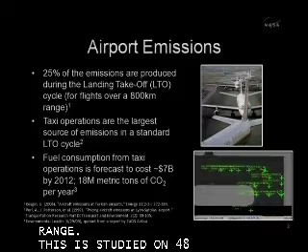All right, so there are some statistics I'd like to share with you. About 25% of emissions are produced during the landing and takeoff cycle, or LTO cycle, for flights over 800 kilometer or 500 miles range. This is a study done on 48 airports in Turkey. And the LTO cycle basically includes final approach and landing, taxi in and taxi out, and climb phases of flight.

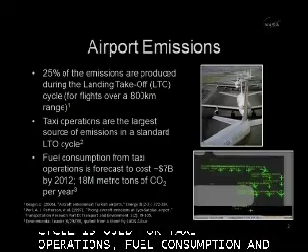And taxi operations are the largest source of emissions in a standard LTO cycle. A study showed that up to 72% of the emissions out of the LTO cycle is used for taxi operations. A huge amount of fuel consumption and emissions are from taxi operations. And then another report says fuel consumption from taxi operations is forecasted to cost about $7 billion by 2012 worldwide, and 18 million metric tons of carbon dioxide per year.

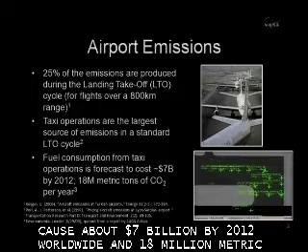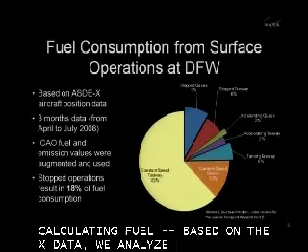By the way, these statistics are based on ICAO data bank rates, which has very approximate, high-level approximation solutions. So NASA has done more work on the method development for calculating fuel consumption and emissions for surface operations. So based on the ASDE-X data, which is quite accurate surface surveillance data system, we analyzed each aircraft trajectory so that we divided taxi phase of flight into different states of aircraft.

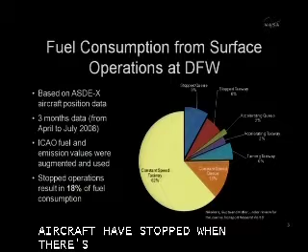For example, aircraft have stopped when there is a queue build, or aircraft is taxiing at a constant speed or decelerating, or aircraft is accelerating from stop to gain speed. So depending on those states of aircraft, we have to use different thrust levels. So we developed a thrust level model based on literature survey as well as pilot interviews.

So based on that thrust level, we can easily calculate flow rate and emission indices from ICAO data bank through extrapolation. So we took data from DFW, Dallas-Fort Worth International Airport data for about 3 months in 2008, and then we calculated total average daily fuel consumption and emissions on those taxi operations.

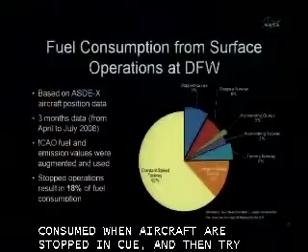So the pie chart you see is the breakdown of fuel consumption for taxi operations. As you can see, there's about 81% of fuel actually consumed for constant speed taxiing or decelerating type of operation, normal taxi operation. But 18 to 19% of fuel is consumed when aircraft are stopped in a queue and then try to gain speed by accelerating. So up to as much as 18 to 19% of fuel is consumed for those stop operations.

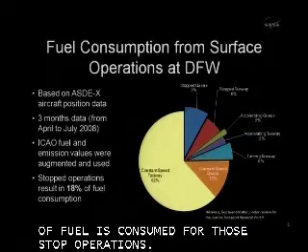So if we can somehow eliminate those stop operations, or reduce stop operations as much as we can by making surface operations much more efficient, then there is tremendous gain in fuel saving as well as reduction of emissions and noise. And the next chart shows, again, the same data analysis result, average daily fuel consumption and emissions.

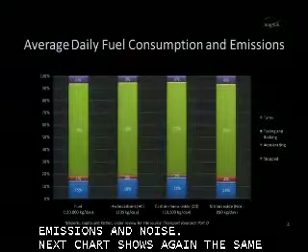So as you can see, not only the percentage of fuel consumption and emissions on taxi operations breakdown, but it also shows the total amount of fuel consumed per day and also emissions, basically hydrocarbon, carbon monoxide, and nitrogen oxide emissions. So for example, for fuel consumption, there is up to 120,000 kilograms or 40,000 gallons of jet fuel used for daily taxi operations.

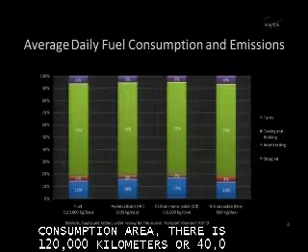So 18 to 19% of that is almost like 7,000 gallons of jet fuel being consumed just for stop-and-go type situations. So if you do simple math, 365 days a year, it ends up like $5.5 million of fuel cost spent just for stop-and-go situations for the Dallas-Fort Worth International Airport situation. So that's quite a significant amount of the dollar spent wasted for stop and go situations.

So the question is, can we make it better, or can we make the surface more operationally efficient? That is kind of the focus of NASA surface research. All right, so the surface environmental research that NASA is conducting is to develop concepts of energy efficient operations and decision support tools to make surface operations much more efficient, and thus will lead to less environmental impact. So we focus on more efficient operations that will lead us to less environmental impact.

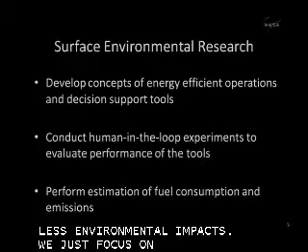And secondly, with the concepts and technology algorithms we develop, we also need to conduct various types of evaluations, including humans-in-the-loop experiments, to evaluate performance of the tools and algorithms and so forth. And then based on those simulations, we can perform estimation of fuel consumption and emissions to verify the environmental benefits out of this efficient surface operations.

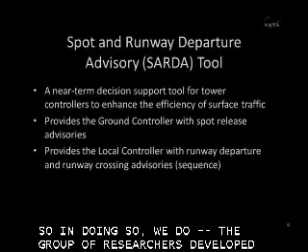So in doing so, the group of researchers developed a near-term decision support tool for tower controllers to enhance the efficiency of surface traffic. We call the tool Spot and Runway Departure Advisory, or SARDA tool.

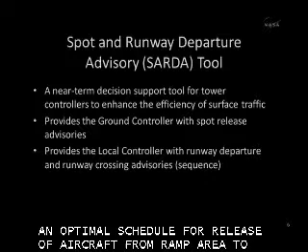The basic concept is to provide an optimal schedule for release of aircraft from the ramp area to the movement area, which is the taxiway, and then provide tactical advisories to the controllers working on the air traffic control tower, basically ground and local controller.

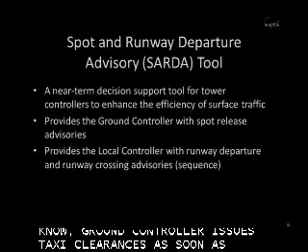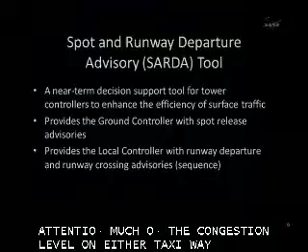Current operations, as you may know, ground controllers issue taxi clearances as soon as aircraft are waiting at the spot, regardless of runway capacity. They don't really pay attention to the congestion level on either taxiway or runway queue. They just send out aircraft as soon as they're ready to taxi into the taxiway system.

So in a nutshell, the tool provides the ground controller with optimal spot release advisories, basically sequence and timing advisory. It tries to minimize the number of aircraft taxiing on the taxiway and runway queue while still maintaining maximum throughput. We don't want to run the runway queue dry, but we try to maintain the minimum number of aircraft in the queue so we can still achieve maximum throughput.

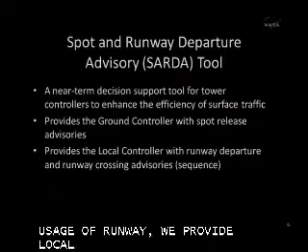In addition, the tool also provides the local controller with runway departure and runway crossing advisories. In order to maximize the usage of the runway, we provide the local controller with tactical advisories, basically sequence advisories for takeoff and runway crossing for arrival aircraft.

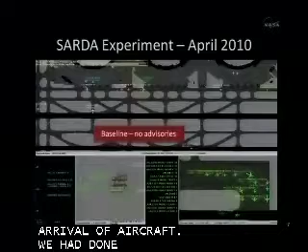So we had done a human-in-the-loop simulation called the SARDA experiment in late April and early May. What you see is a screenshot of a simulation when the controllers didn't have advisories.

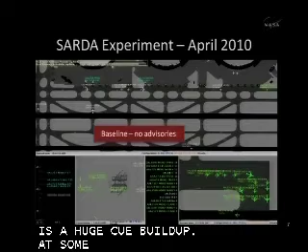As you see, there is a huge queue build up in the runway queue. At some point there are like 16 aircraft just waiting and moving very, very slowly, spending lots of extra fuel, and then generating excessive emissions.

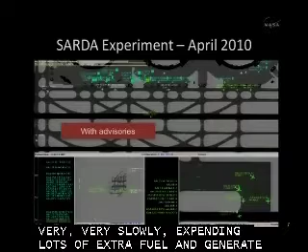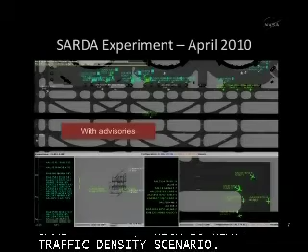Compared to that, we also ran the same scenario, which is a heavy traffic density scenario, and then we provided controllers, both local and ground controllers, with advisories. As you can see, there are only about 4 or 5 aircraft in the queue, but controllers were able to achieve the same amount of throughput without much difficulty, just following the guidance and control advisories.

But you may notice that in the ramp area it's a little bit busier than the previous case, because we haven't really addressed ramp area congestion issues here. Our idea was to meter the departures at the spot rather than at the gate.

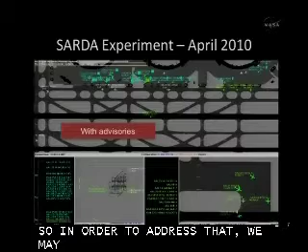So in order to address that, we may need to introduce some sort of collaborative decision-making type of scheme so that airlines and ATC can collaborate on pushing back the aircraft. I am expecting that Chris Brinton is going to address that technology after this.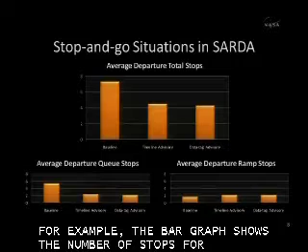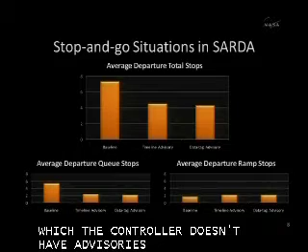The first bar is baseline, where the controller didn't have advisories to use, at 7.4 stops per aircraft, versus the 2 other bars next to it showing the number of stops per aircraft when the controllers were using advisories.

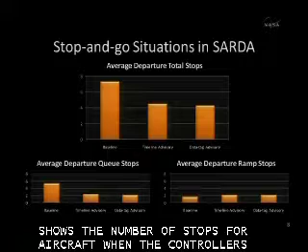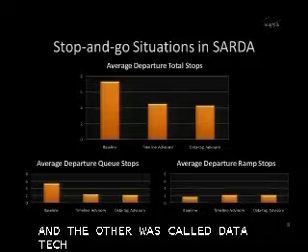We had 2 different formats for advisories: one called timeline advisory, and the other called data tag advisory, depending on how we display the advisory, whether in the data block next to the aircraft call sign, or the timeline type of sequence and timing advisories.

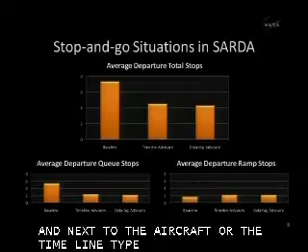In the departure queue, it's very, very significant. On the left lower corner is average departure queue stops. With baseline, without advisory, there were about 5.45 stops per average aircraft versus about 2.2 stops per aircraft when the controllers were using advisories.

And the ramp area stops were slightly increased, as you may expect. And then there are other areas of environmentally friendly surface operations.

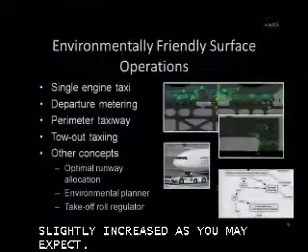As you may see, more airlines are asking pilots to taxi with a single engine running, and then they ask the pilot to turn on the second engine when the aircraft is near the runway, 2 to 3 minutes before runway entrance or something like that.

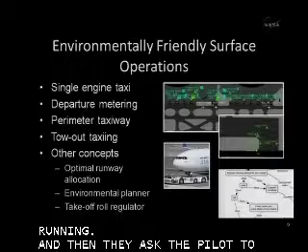And then the second technique is obviously departure metering. So the tool that I just introduced is a kind of departure metering, and there are other schemes of departure metering.

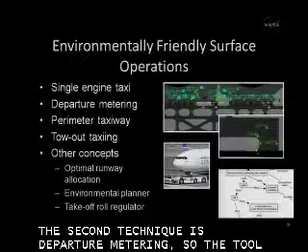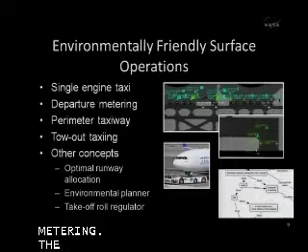And then perimeter taxiway can save taxi delay or taxi fuel and emissions in certain conditions, instead of waiting in a runway crossing queue, just taxiing all the way to the gates.

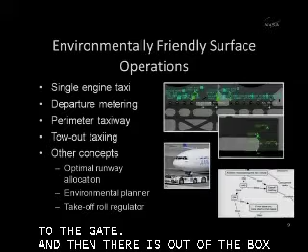And then there's an out-of-the-box idea, for example tow-out taxiing, which uses electric power to tow the aircraft instead of using a tow bar or tractor. And then other concepts using an optimal runway and environmental planner and a takeoff roll regulator. Because of time, I'm not going to go through all of this.

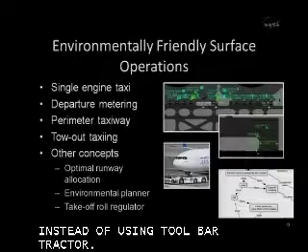In summary, we developed a method to calculate fuel consumption and emissions for phases of taxi operations, and our data analysis results at DFW show that as much as 18% fuel can be saved by eliminating stop-and-go situations. Even more can be done theoretically.

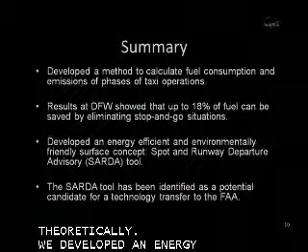And we developed an energy efficient and environmentally friendly surface concept called SARDA. The SARDA tool, by the way, has been identified as a potential candidate for technology transfer to the FAA through the research transition team. So with that, thank you for listening.